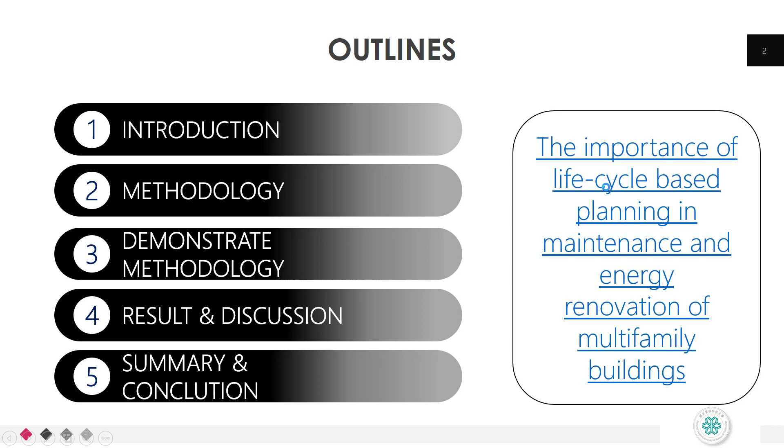The paper will be discussed, and we can read more details by clicking this link title. If we read the keywords in the article info, there are four keywords: energy renovation, energy efficiency, maintenance, and buildings. Each keyword will illustrate more clearly what this title actually means and what will be discussed inside the paper.

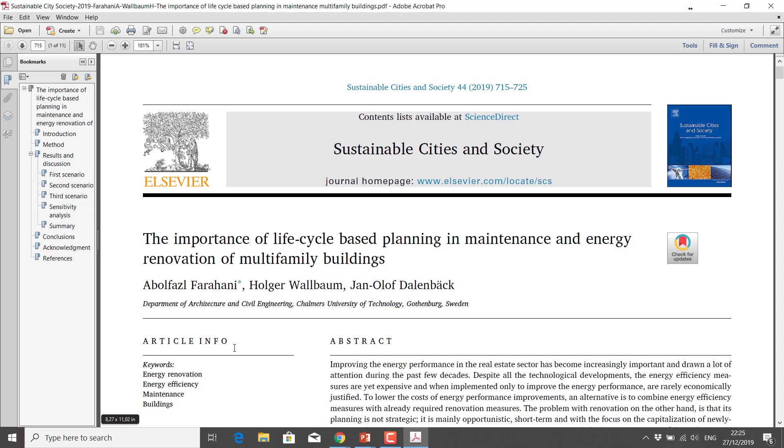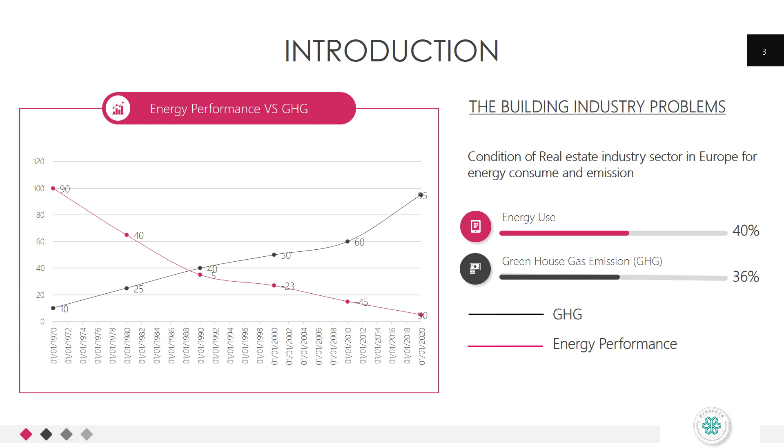Starting from the introduction, the motivation for the author to perform this study comes from the recent condition of the real estate industry sector around the world, but more focused in Europe, for energy consumed and emission. Total energy consumed by the building industry, including the real estate industry, is around 40% of total energy consumed in the world, and the emission contributed by the building industry is around 36% of all total emissions from other sectors. A graph of energy performance versus greenhouse gas emission, or GHG, is depicted showing that as energy performance declines, GHG emission increases, and this brings impact to global warming.

Coming from this crucial problem in the global building industry sector, we need to find a solution to solve and reduce the impact from this industry. A recent solution for solving this problem is by doing preventive maintenance and renovation to improve building energy performance, and finally reduce the GHG emission.

However, there are some barriers in doing building renovation. Number one, renovation processes are complex and uncertain in terms of decision making and planning. This is mentioned by Economidou, Laustsen, Ruyssevelt, and Staniaszek in 2011, also mentioned by Femenías and Fudge in 2010, followed by Reyers and Mansfeld in 2001, and the oldest one is Rosenfeld and Shohet mentioned in 1999.

Number two, a lack of knowledge in the renovation process, mentioned by Mjörnell, Boss, Lindahl, and Molnar in 2014. They also said the problem is that opportunistic renovation planning lacks maintenance planning.

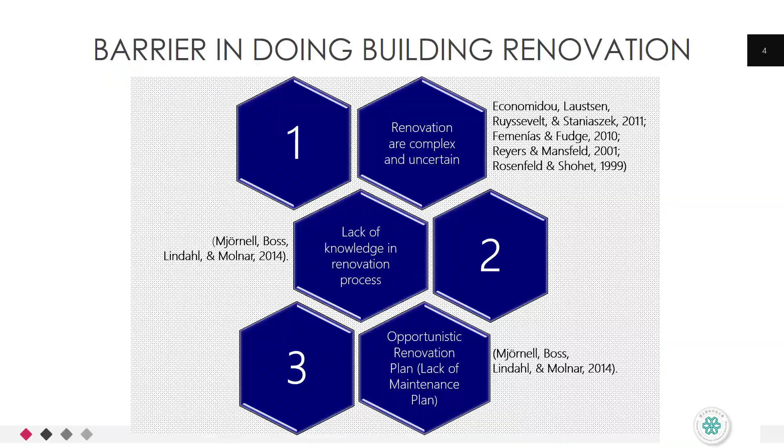The aim of the study is to present an extension of the maintenance model already developed by the author Farahani in 2018. This model provides a systematic approach to cost-optimal maintenance and renovation planning by combining the deterioration function of building components with respect to service life costing. Then this model will include energy performance improvement as an optimization criterion. The addition of energy performance improvements includes both the marginal investment cost of implementing energy efficiency measures and the reduced cost of operation in the economic evaluation of energy renovation plans.

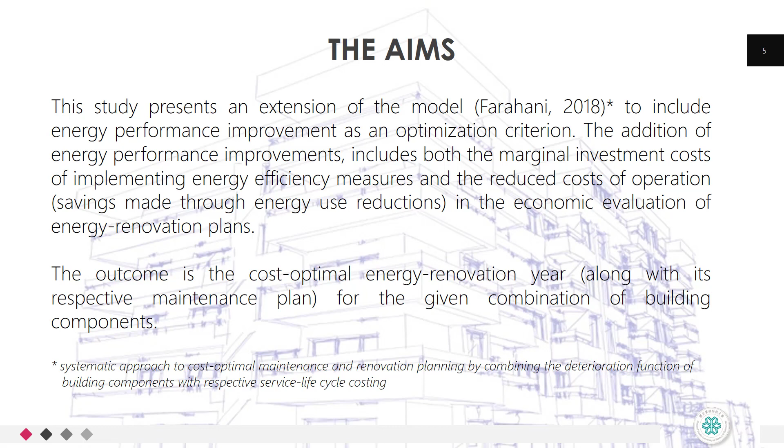The theoretical framework used in the study is based on the deterioration model proposed by Farahani in 2018. The deterioration behavior in this model is divided into phases. Phase 1 describes the initial irreversible degradation process, and phase 2 describes the period during which the condition of the building component is retrievable by means of maintenance.

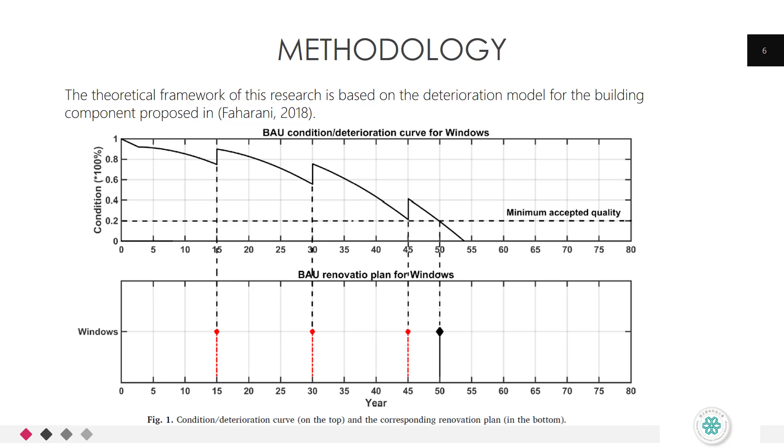This is illustrated in figure 1, the condition deterioration curve on top. The minimum accepted condition for each component in this figure is specified as 0.2, which determines the end of the corresponding estimated service life, or ESL. When the condition state falls below the line of minimum accepted condition, it is considered to have reached failure. The bottom figure shows the corresponding maintenance in years 15, 30, and 45, and renovation in year 50.

In the flowchart, the input variable for each step is placed in the right side square box. This flowchart illustrates the modeling process used for the following simulation. The input variables shown in the figure can be estimated or taken from available datasets, then calibrated through inspection, placed on the right side of the flowchart.

Starting with the specified component we want to observe, we follow with the next steps to perform the simulation of the condition and degradation, and also check the initial service life. Then the next stage is to perform the maintenance action and check the effect of the maintenance. We can adjust if it's not correct.

Following that, the next step is the estimated service life, or ESL, then followed by incorporation of the energy efficiency measure at ESL by checking the obsolescence of the building, and calculation of the energy saving against the reference. This is followed by calculation of the EAC value, and the last step budget constraints and fixed costs to obtain the optimal renovation year.

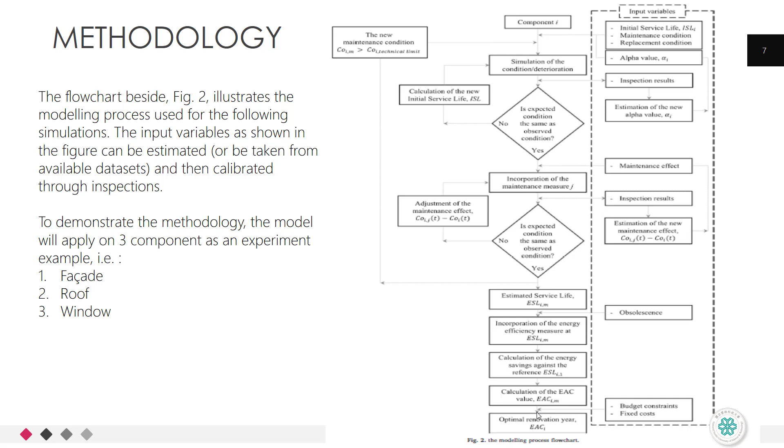To demonstrate this methodology, the model will be applied to three different components as an experiment example: facade, roof, and window.

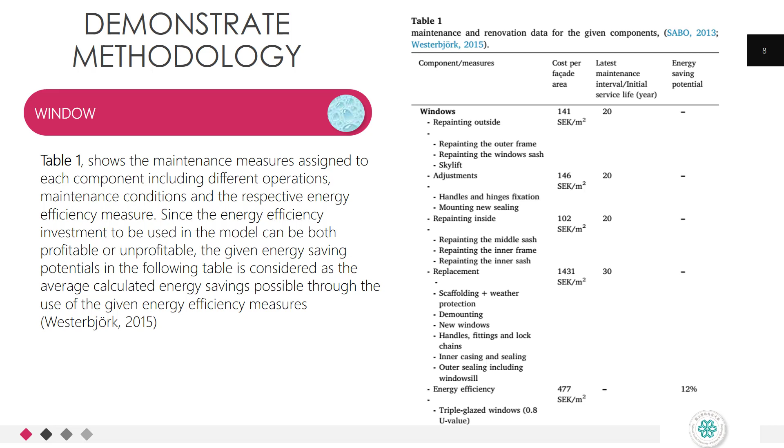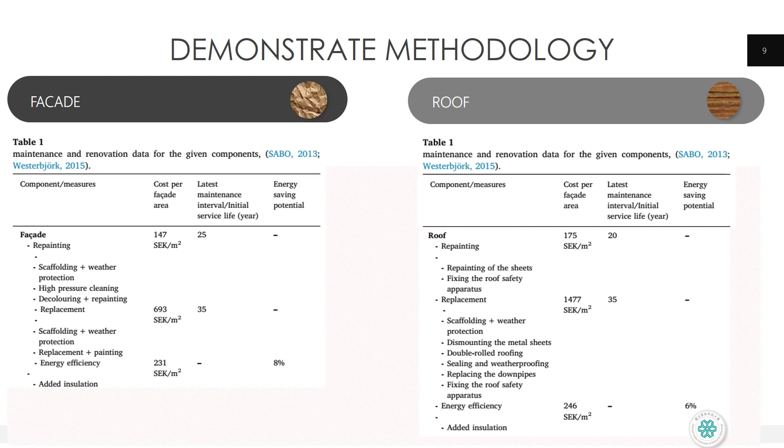With the latest maintenance interval being 20 years. And for the replacement, it will cost 1,477 Swedish krona per square meter, with the latest maintenance interval being 35 years. The energy efficiency measure will cost 246 Swedish krona per square meter. We will get energy saving potential of 6%.

While demonstrating the methodology study, we will apply assumptions for some scenarios. The first assumption: energy efficiency measures for each component are only for illustration purposes. Second assumption: the corresponding cost is based on the Halvera mera study done by Westerbjörk in 2015. And the supporting data of potential energy use reduction are average values also based on the Halvera mera study done by Westerbjörk in 2015. Then the last one: the reference service year in the calculation of energy saving cost is chosen as the longest service life amongst the three components, during which technical or performance requirements for each individual component are met. All of these assumptions we can show in more detail in Table 2.

Assumptions used in the calculation of energy saving done by Westerbjörk in 2015. The parameters consist of 8 parameters. The first one is building energy use. The second one is energy saving potential. The third one is energy price. Number 4 is growth rate in energy price. Number 5 is inflation. Number 6 is growth rate in construction and service cost. Number 7 is discount rate. And number 8 is shared fixed cost.

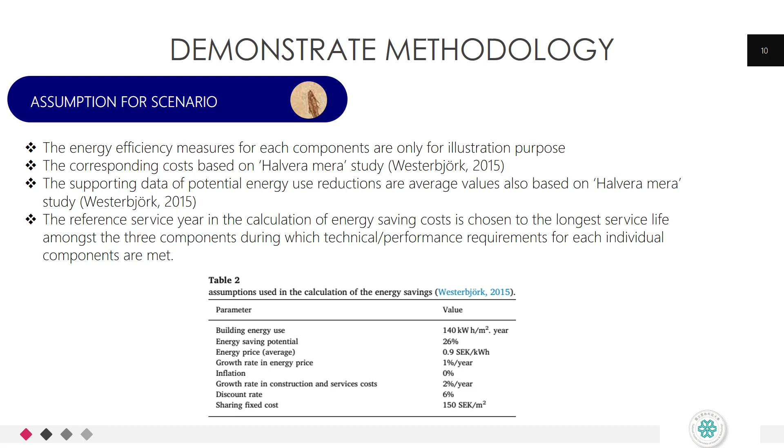There will be three scenarios performed in demonstrating the methodology. The three scenarios are considered to be performed based on the economic effects of timing in the implementation of energy efficiency measures. First scenario: we will plan building maintenance under normal in-use conditions according to industry standard maintenance and renovation guidelines in Sweden. The second one: planning building maintenance under normal in-use conditions, using the proposed method where energy renovation plans are optimized for gradual and deep renovation strategies proposed from this model. And then the last one: we will apply the deterioration model to a building under worsening use conditions.

Summary of the three scenarios, we can see in Table 3. Scenario 1 will include energy efficiency, and this is also applied to scenarios 2 and 3. For the renovation strategy, scenarios 1, 2, and 3 will also use the gradual and deep strategy. For the building condition, scenario 1 and scenario 2 will use the normal condition, and scenario 3 building condition will use the worsening condition. And for the planning approach, this creates differences between scenarios 1, 2, and 3. In scenario 1, we will use the standard from the BAU. In scenario 2, we'll use the cost optimal proposed by this model. Scenario 3 will use the BAU and cost optimal planning approach.

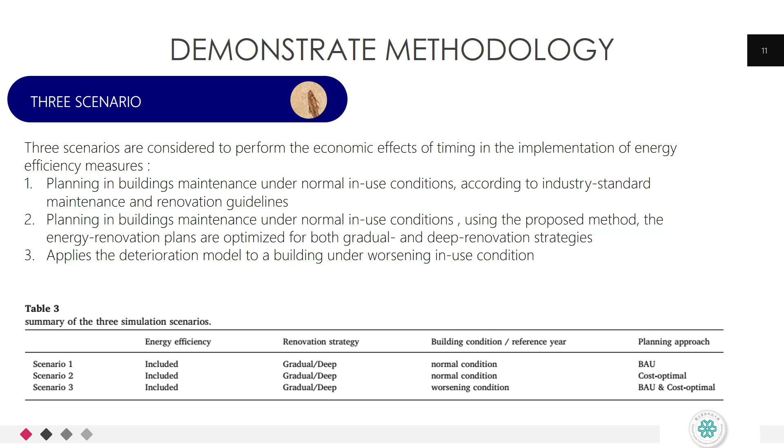Result and discussion for the first scenario. In the first scenario, the energy renovation plans are presented for the three components using the industry standard maintenance and replacement interval given by the local guidelines from SABO 2013. For the gradual energy renovation strategy in this scenario, window and roof are scheduled to be maintained every 15 years, whereas for the facade, the maintenance interval is set at 20 years. And the estimated service life should attain 50 years for facade and windows, and 45 years for the roof.

Then the calculation of individual and total cost for the given plan, we can see in more detail in Table 4. In Table 4, the fixed costs are the shared fixed and logistic costs, and the energy savings are the savings made through energy use reduction. We can see this in Table 4.

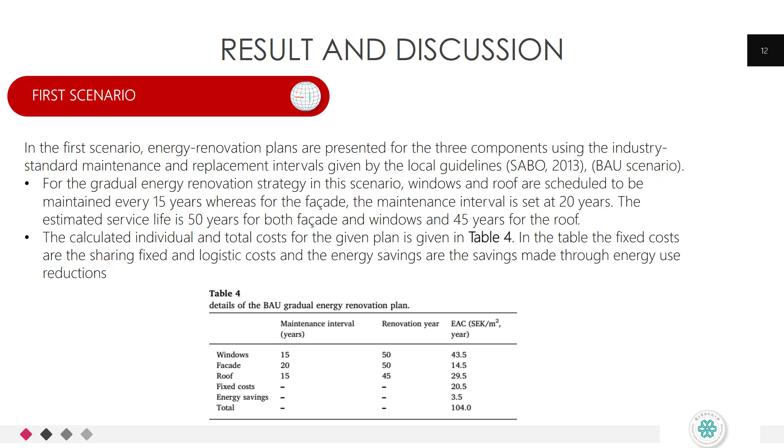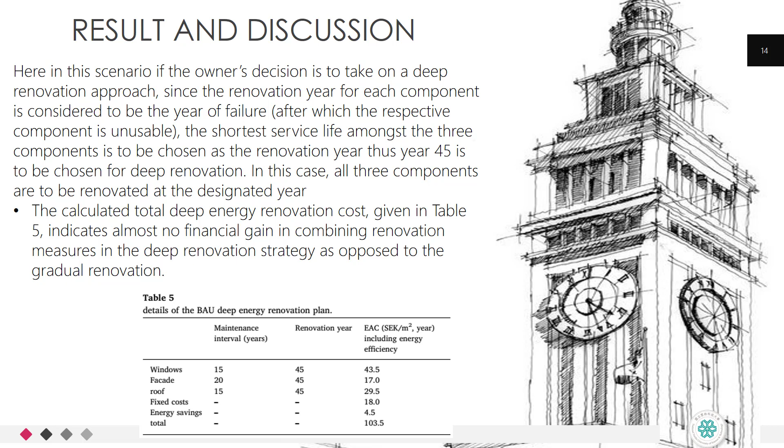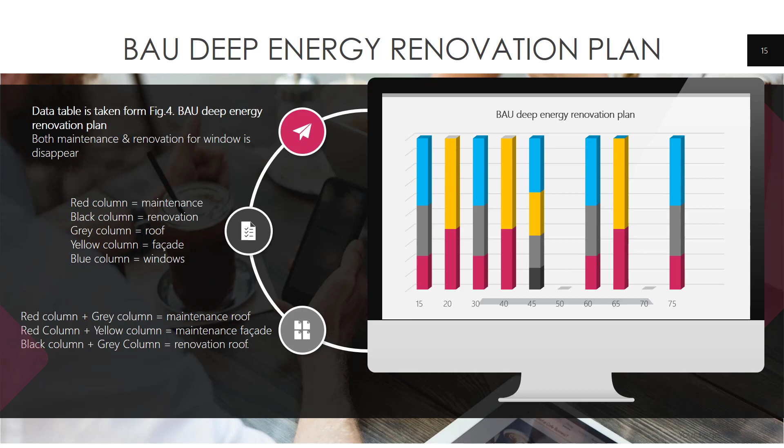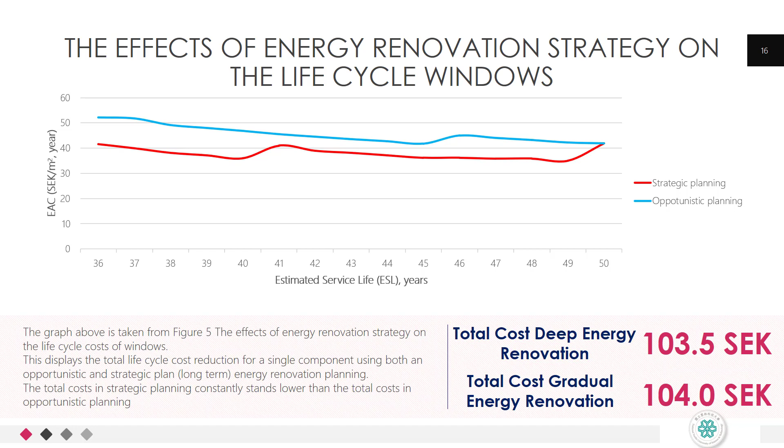In total, we should pay attention: the total cost for deep energy renovation is 103.5 Swedish krona, and the total cost for gradual energy renovation is more expensive, at 104 Swedish krona.

The results and discussion for the second scenario: in this scenario, the model is used to obtain the cost-optimal energy renovation plans for the respective components. In this plan, the potential combined maintenance and energy renovation years for the three components that result in the lowest total life cycle cost are chosen as the cost-optimal energy renovation plan.

The total life cycle cost for each component, together with the total fixed cost and energy saving, is given in more detail in Table 6. For the windows, the maintenance interval is 18 years and the renovation year is 48, with a cost of 37.5 Swedish krona per square meter per year.

For the facade, the maintenance interval is 24 years, renovation is at 42 years, and it will cost 15.5, and so on for the roof.

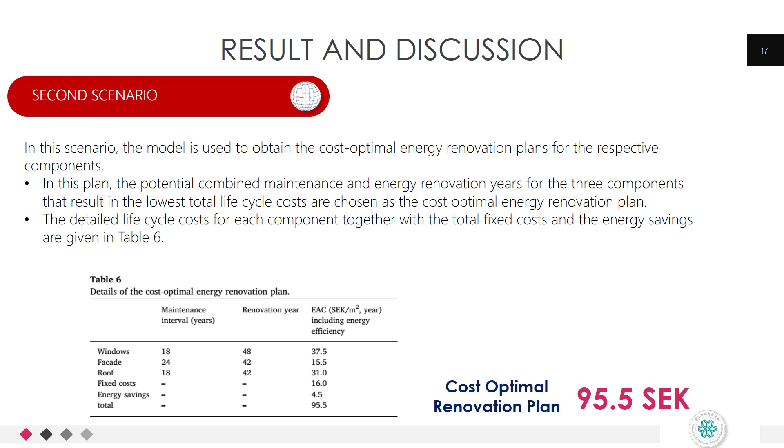And the total cost for this optimal energy renovation only costs 95.5 Swedish krona. As we can see, it's cheaper than the previous scenario.

Then the last one, the third scenario. In this case, it assumes that the in-use condition for windows and facade have worsened over time. Due to changes in indoor condition, outside environment, and tenants' behavior, the window and facade deterioration rates are assessed to have increased so that the assessed conditions equal the expected condition in 4 and 5 years respectively.

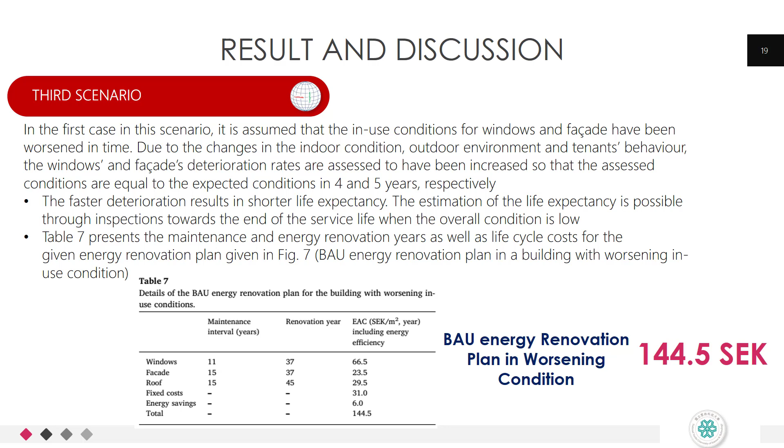It will be more expensive if the deterioration is going faster. And the renovation plan is taken from figure 7 in the paper.

There is more activity, maintenance, and renovation. You need to do maintenance faster, in year 11 for the windows and faster in year 15 for the roof and facade.

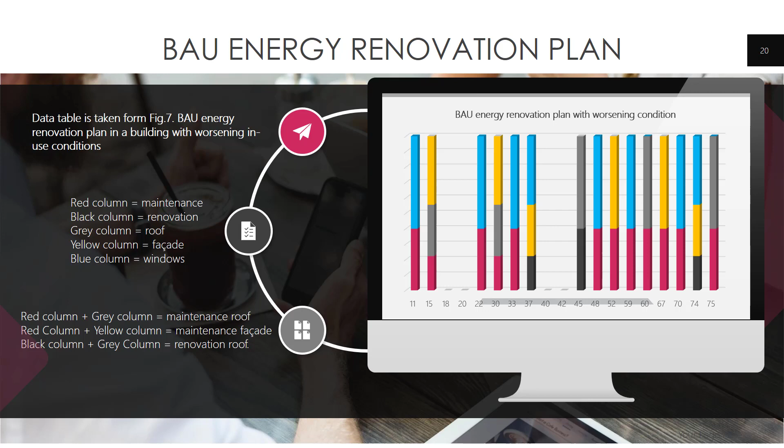Then in year 22 we need to do maintenance again for the windows, followed in year 30 by maintenance for the roof and facade. So on until year 75. There will be more activity to do maintenance and action if the condition is worse.

In the following example, the application of the proposed method in the implementation of changes in the in-use condition and in the deterioration behavior of building components, and so the life expectancy, is demonstrated.

Considering the faster deterioration of window and facade in this case, the estimated service lives are shorter, and the total life cycle cost for the two components in table 8 are higher than the cost optimal plan under normal in-use in table 6.

In table 8 we can see the windows: the maintenance interval is in year 13, the renovation year is in year 38, and it will cost 54.5 Swedish krona per square meter.

And the facade: we need to do maintenance with the interval in year 16, renovation in year 38, cost 22.5. The roof maintenance interval is in year 16, and renovation in year 44, with cost 30 Swedish krona.

We take a total cost of 126.5 Swedish krona. Compared with the previous condition of the works without using the cost optimal renovation plan, this model for the cost optimal renovation is cheaper.

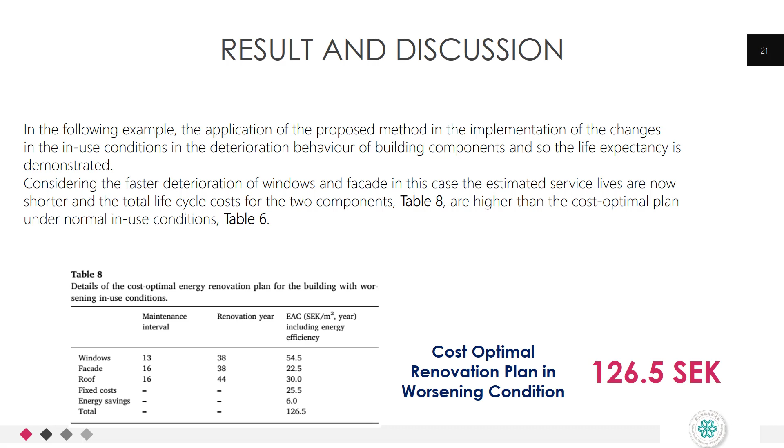The BAU model. We can see more detail for the maintenance and renovation in a figure taken from figure 8 in the paper.

Just only a few maintenance activities compared with the BAU. Around 11 or 10 activities for maintenance and renovation, and not as fast compared with the BAU. BAU will do the first maintenance in year 11.

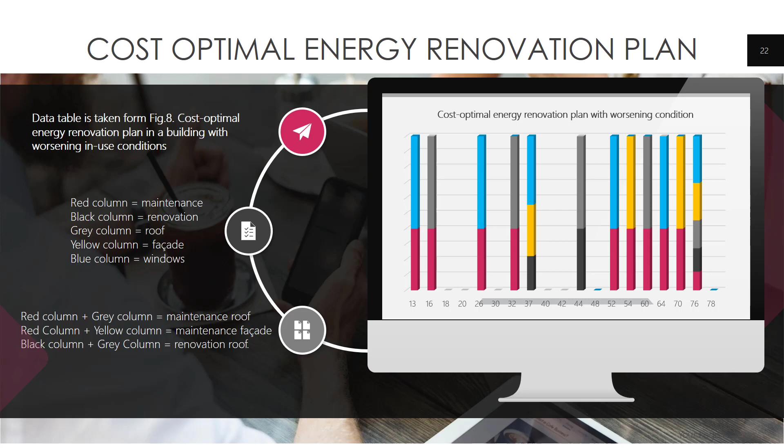From this model for the optimal energy renovation, we do the first maintenance for windows in year 13, followed by maintenance for the roof in year 16. Then the next interval is year 26 for maintenance on windows, and year 32 for maintenance on the roof, then year 37 for renovation of the facade and windows, and so on for the next activity until year 76.

Summary and conclusion from this paper: we can see this study shows that ignoring the value loss in the economic evaluation of renovation results in an overestimation of the potential gained benefit. Because optimal maintenance or renovation planning results indicate the importance of long-term energy renovation planning, action taken toward the end of a component's life expectancy not only limits the optimization opportunities but also results in below standard condition or performance level for the respective building components.

The second conclusion that we can take: a 38% increase in energy renovation cost due to the changes in the in-use condition or the scenario signifies the importance of the in-use condition in the economic performance of building components.

Then the third conclusion: the worsening of the in-use condition results in shorter service life, thus a higher chance of unexpected failure. These changes, as soon as reported, should be stopped or fixed to avoid further loss of value.

Then the last one: the maintenance and energy renovation planning model is quite insensitive toward changes in the investment cost and the potential energy use reduction. Therefore, the resulting cost optimal energy renovation plans can be used even with uncertain energy investment data.